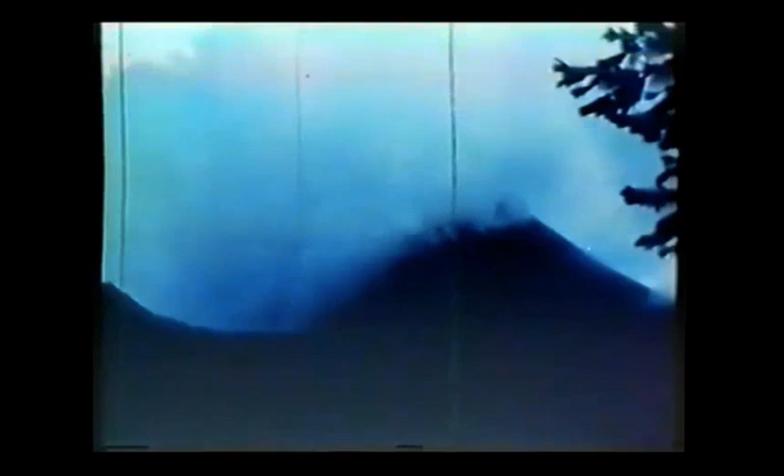The lessons from Wairakei Bore 204 are numerous and followed a sequence of events which, if any one had not taken place, the blowout would not have occurred. The burst delivery hose, which had to be renewed, the time taken to do that allowed the well to heat up and come under pressure.

Another factor was not enough water was pumped to cool the well to quench the steam in the 2-meter cavity, just in the same way as it's possible to take a kettle off the boil by adding enough cold water. Today, improvements on similar jobs have been made as a direct result of the lessons learnt on bore 204.

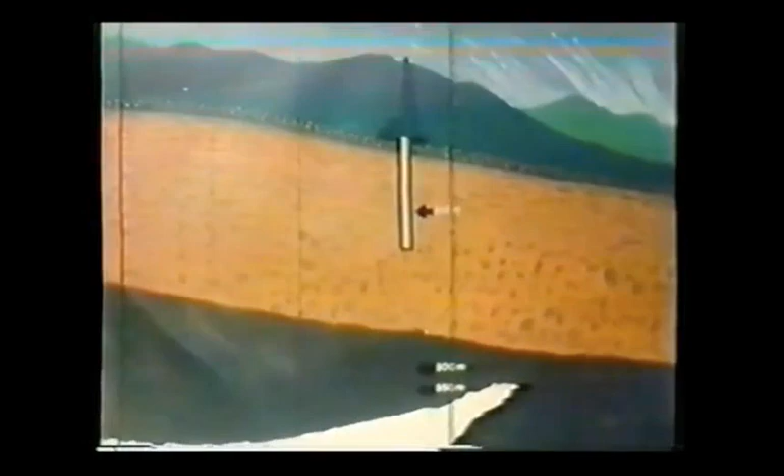Casing is set and cemented at programmed depths, be the walls of the bore hot or cold. If that third string had been put down as scheduled, it's possible the well would have been saved. Drilling went on in cold conditions. When the bit dropped that critical 2 meters, the inference was it was into a hot zone.

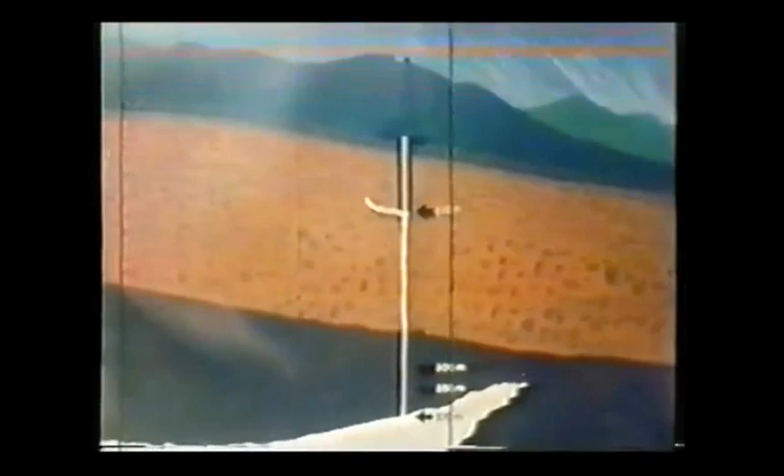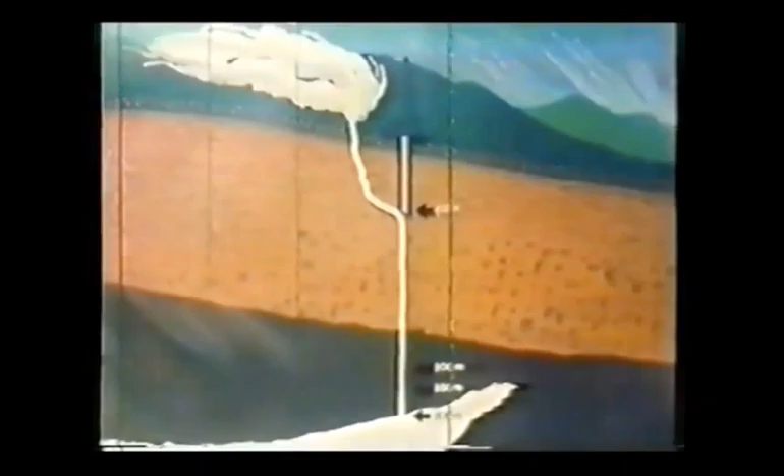Since no casing was there to contain the pressure, the steam found its own escape route. Up the well and out below the bottom of the second casing string, and probably along a fault to the surface. Nowadays, with this firmly in mind, procedure for drilling geothermal wells in new or unknown areas of New Zealand call for the added safety measure of a false protective sheathing when drilling even deeper into hot formations.

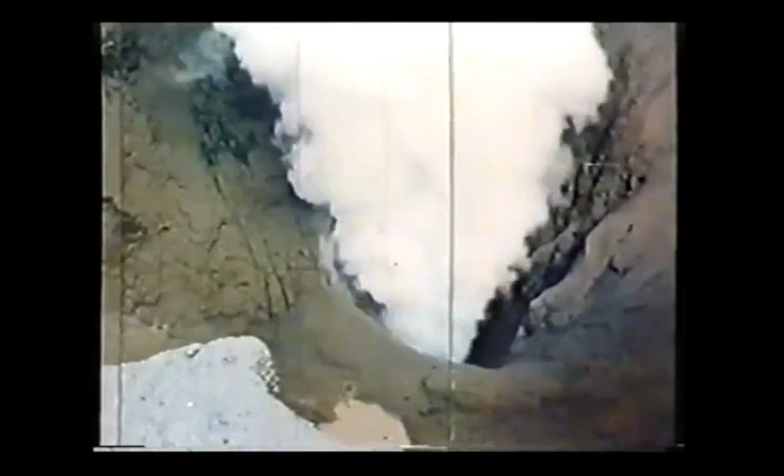The bore finally died in November of 1973, 13 years after its tumultuous birth. It left its 22-meter deep and 70-meter in diameter scar as witness to the disastrous sequence of events which triggered it.

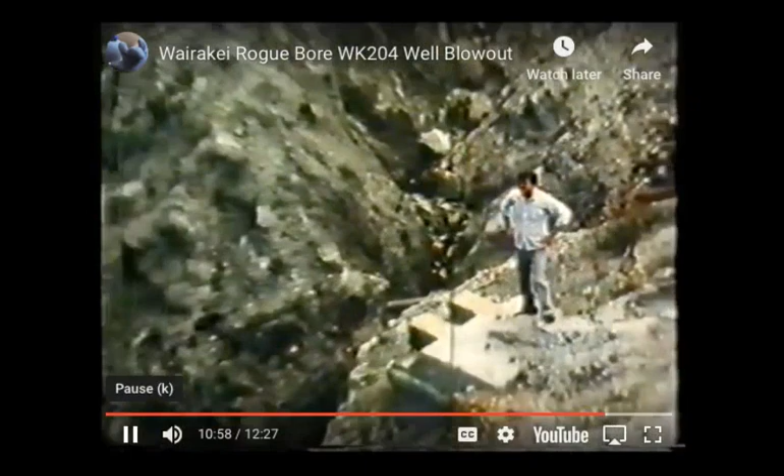That was a glimpse of what could go wrong in a geothermal well. It's one of the reasons these measurements are essential for ensuring the safety during drilling and operation of the wells. Here's an outline of what we're going to talk about today in this lesson.

We're going to start with downhole measurements, their types, how and why they're used. Then we'll learn about some examples of the mechanical and electronic instruments used in downhole measurements. After that, we'll move to flow measurements and get to know why they're used. Then we'll talk about some common issues regarding the practice of downhole measurements.

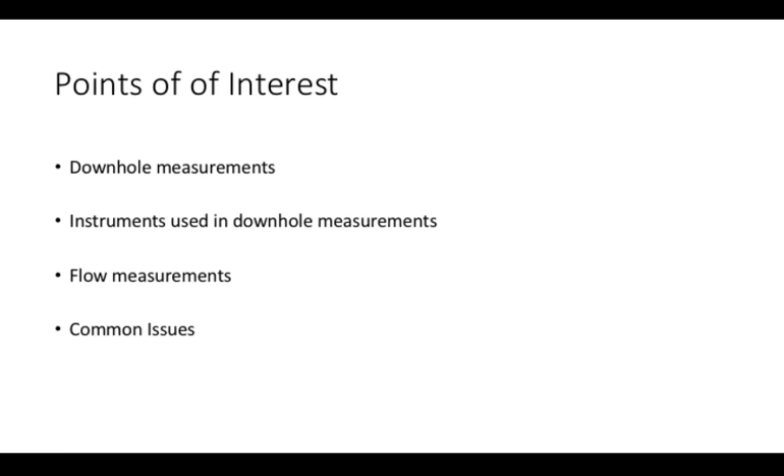So, the most important and essential measurements that are frequently done are temperature, pressure, and flow. Well testing programs include these measurements during all stages, starting from drilling and continuing on to well completion, then heating and production. The data obtained from these tests are usually used in conjunction with data from other drilling and production operations in order to infer some meaning from them.

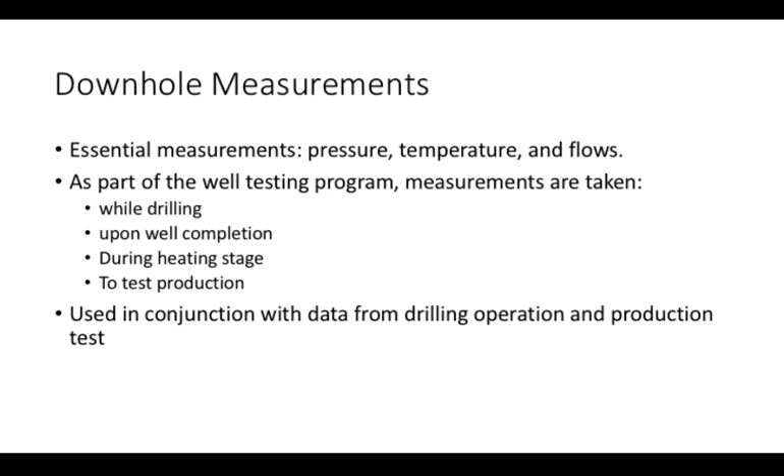An example of downhole measurements are temperature and pressure logs. These are the most frequently performed as they are critical to the performance of the well. They can be measured along the full depth of the bore with no change to the well conditions, so you don't have to stop operation or halt anything.

Another one is formation imaging. It helps us know the geometry or the structure of the wellbore by providing 3D images using technologies like ultrasonic or microresistivity. It's designed to find fractures and the geological formations down the wellbore. One of its issues is that it has limitations due to the fluid inside the wellbore, which interferes with the readings.

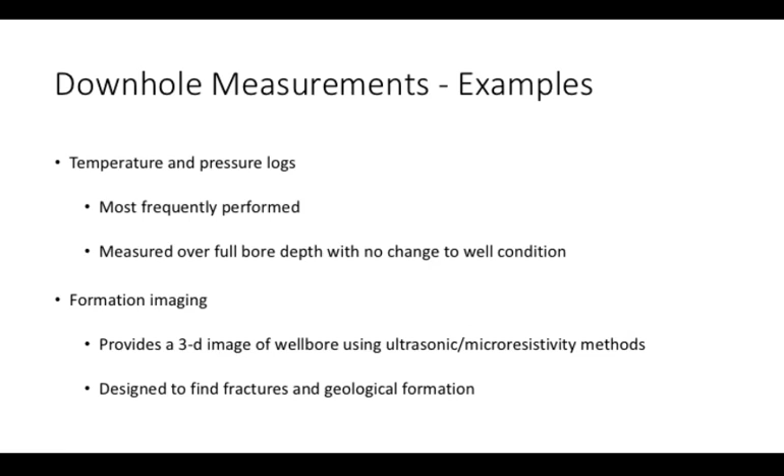Another example is something called the Go Devils. This measurement is also called sinker bar or gauge ring surveys. It is a plug gauge that determines the drift diameter of the well casing and the liner. These parts are positioned in most wells, not all of them, perfectly vertical from the ground down, but they tend to drift from their position during operation.

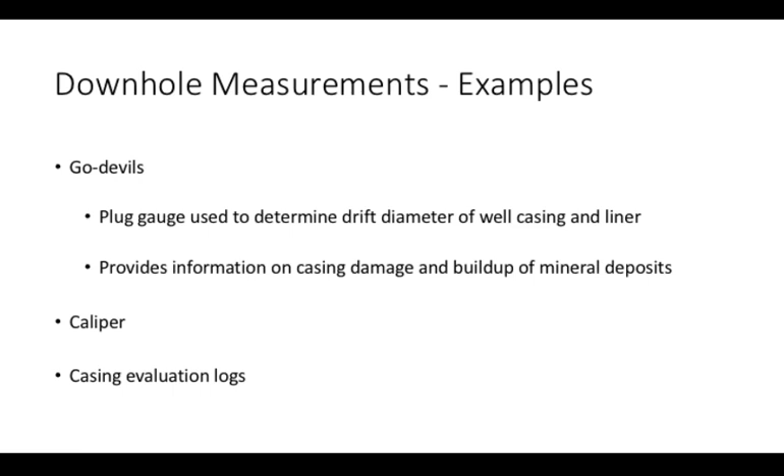The Go Devils are relatively inexpensive, yet they provide vital information for casing damage and mineral buildup within the wellbore. Two other examples are casing evaluation logs and calipers, but we will not go into detail with them.

So, the instruments that we use to make these measurements. I'll start with mechanical instruments. First one is the Geothermograph. It's the first instrument ever designed for measuring temperature within the geothermal wells. It was developed in 1950 for exploration of the Wairakei field in New Zealand. That's the field where the rogue bore was, we saw in the video.

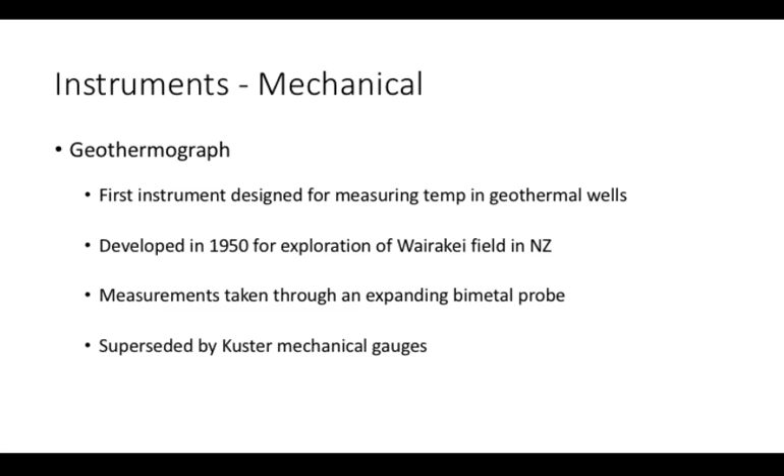It takes measurements through an expanding bimetal probe, which expands through thermal conductivity, and it makes traces on a carbon plate, and these traces are used to infer what the temperature was. The instrument is definitely outdated by now, and it was superseded by Kuster mechanical gauges, which we will talk about next.

The Kuster KPG gauge is known for being a robust and inexpensive instrument. It utilizes an old design used in oil wells, but it delivers reliable results in geothermal wells. It fits into any well that has no blockages. All it needs is 32 mm diameter, and it requires minimal maintenance for temperatures up to 300 degrees Celsius. Over that, it would still be able to function, but would need maintenance more frequently. And the accuracy provided by this instrument is in the order of 1 degree Celsius, and for pressure it's 0.2%.

Excuse me while the slides load.

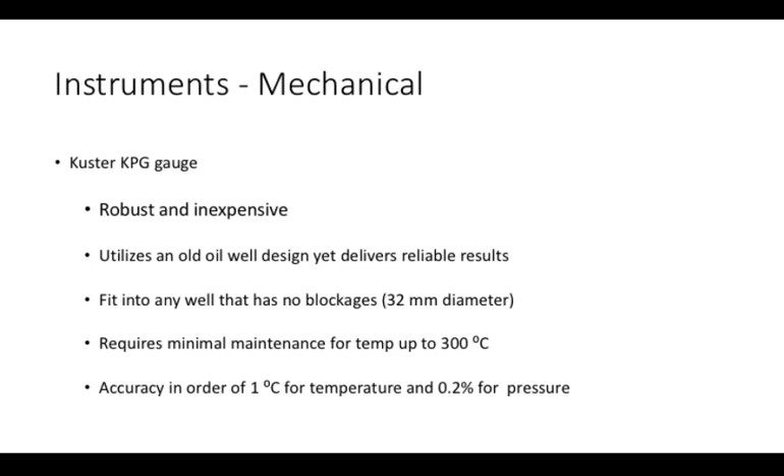The most common electronic instrument used is the PTS, pressure temperature spinner. It provides data through either real-time E-line, that's like instantaneous values that the engineers get, or saved memory, which means that you'll have to wait until the instrument is pulled out physically and then you get the readings. It's contained inside a Dewar flask to maintain its temperature below 100 degrees Celsius. Above that, it wouldn't be able to function properly.

It provides accuracy better than 1 degree Celsius and 0.1 bar for pressure. Its downside is that it has limited downhole time due to its inability to function in high temperatures.

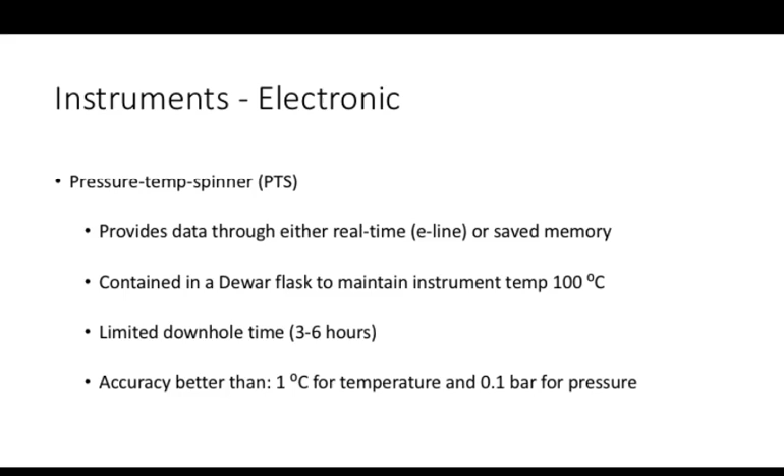Next, we have the flow measurements. The most common one is the spinner profiling. It's the same electronic tool mentioned earlier, the PTS. It's performed routinely during injection or production, and it's useful for assessing interzonal flows while the well is shut. It requires stable well status that puts constraints on variations in flow or conditions of the well, and it adds very little cost over the temperature and pressure measurements. Two other methods for flow are temperature profiling and tracer injection, but we will not go into detail about those.

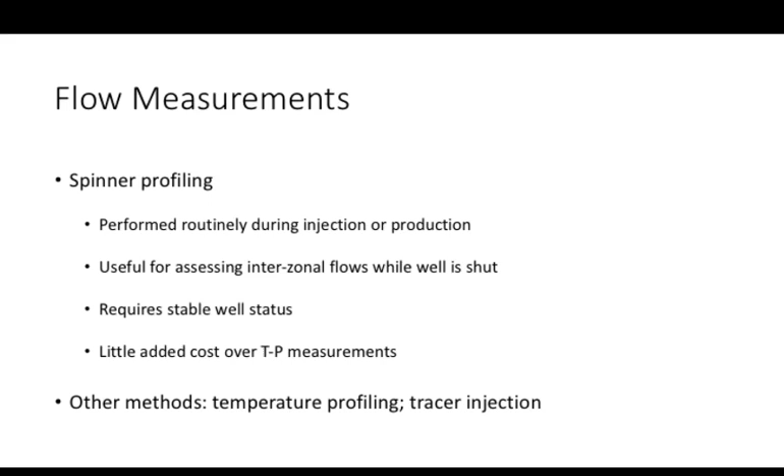So the common issues. Depth measurement. Because instrument depth requires accuracy in the counter system to be within 1,000th accuracy, you get issues when it comes to the measurement. To overcome that, the calibration can be set up over the ground surface or by comparing against known casing lengths. Another issue is well deviation. Many wells are actually purposefully deviated from the vertical, and you need a distinction between true vertical depth and measured depth. Ideally, the elevation of the measurement points and the temperature correction for the expansion are used together.

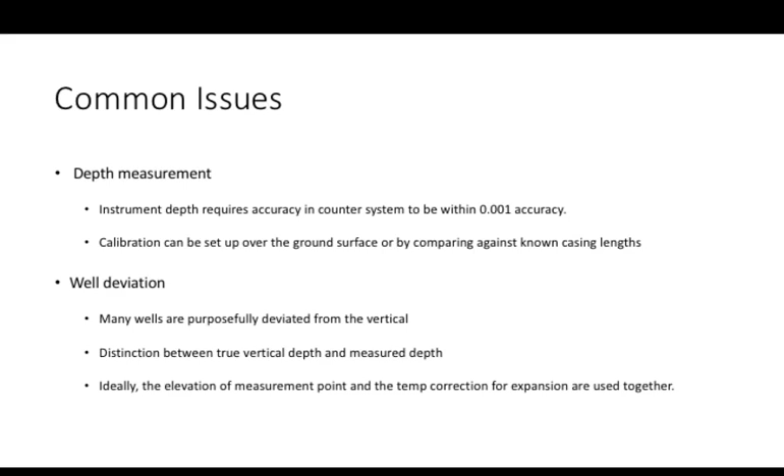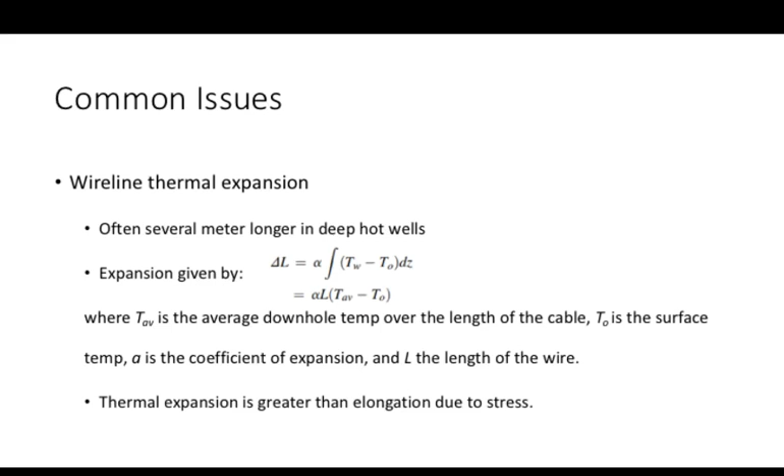Another issue is well stability. Unstable conditions due to surface leaks affect the validity of test data. So to overcome this issue, data is compared between the down log and up log. The down log is data taken as you're going down. The up log is data as you're going back up to the surface. The engineers ensure that they're identical to make sure everything is in order.

Last but not least is instrument lag. Data could be offset while the instrument is moving down the wellbore, just from regular defects in instruments or errors. And to overcome this, some PTS instruments include a casing collar locator to reduce errors.

So to wrap everything up, downhole measurements we talked about are performed periodically to obtain essential data for the operation of the wells using instruments like the Geothermograph, Kuster, or the pressure temperature spinner. The effective use of the instruments provides the data within desired accuracy, as we mentioned, usually 1 degree Celsius, and for pressure either 0.2% or 0.1 bar for the electronic one. Some corrections are applied to account for things like the type of design and the performance in the well.